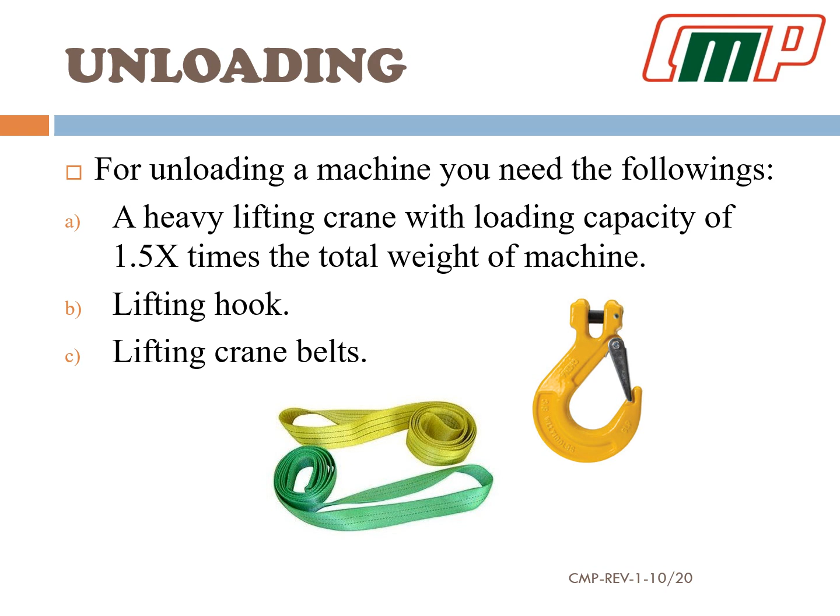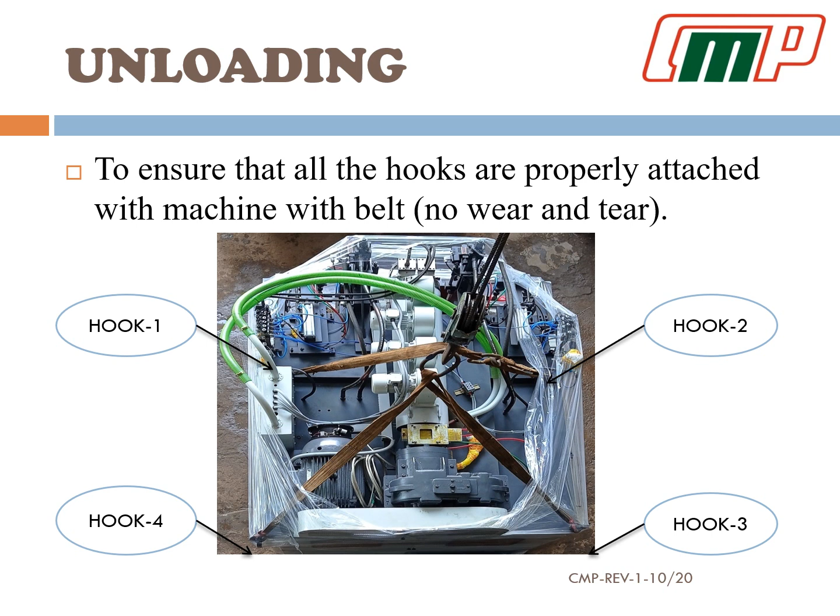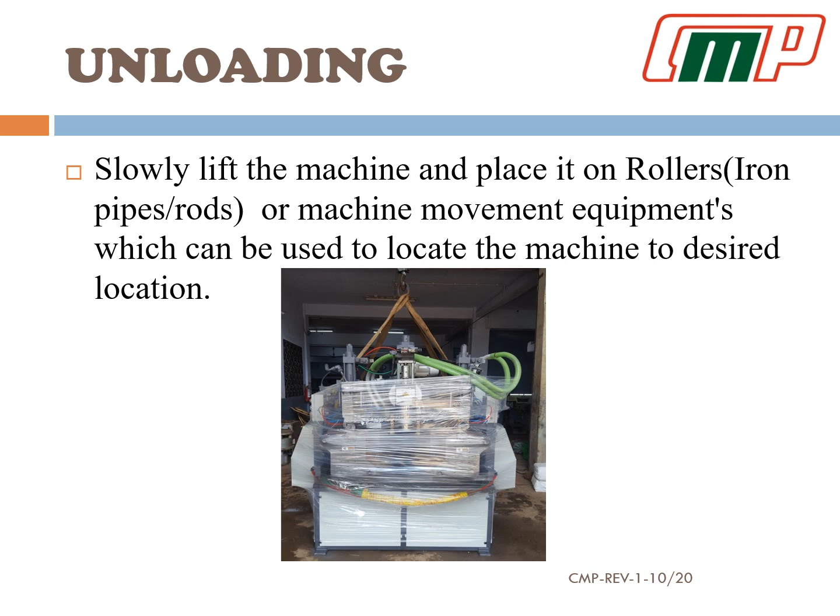Attach the hook, with belts, to the machine. Make sure that all 4 hooks are properly fitted and tightened to the machine, as well as the crane. Slowly lift the machine, and place it on rollers, iron pipes or rods, or machine movement equipment, which can be used to move the machine to the desired location.

Before mounting the machine, you need to note down the following. The foundation should be constructed of concrete. The structure of the foundation should be leveled and free of irregularities. Bolt the machine to the foundation with the help of foundation bolts. You can also use leveling pads or anti-vibration pads.

Make sure there is proper ventilation of the machine, minimum 1 meter, from the back as well as from both the sides. Adequate headroom must be provided for hopper filling. Ensure that the panel is placed to the right side of the machine, with a minimum distance of 1.5 to 2 meters from the machine.

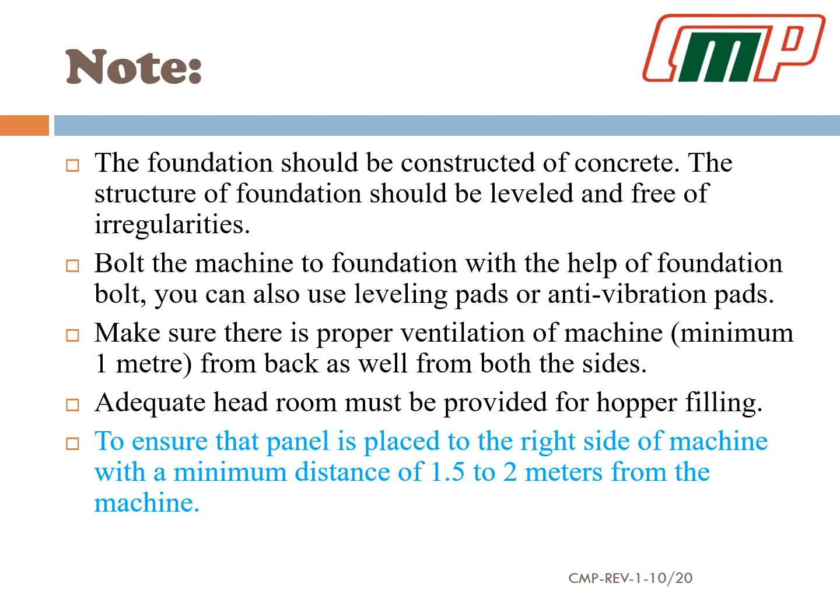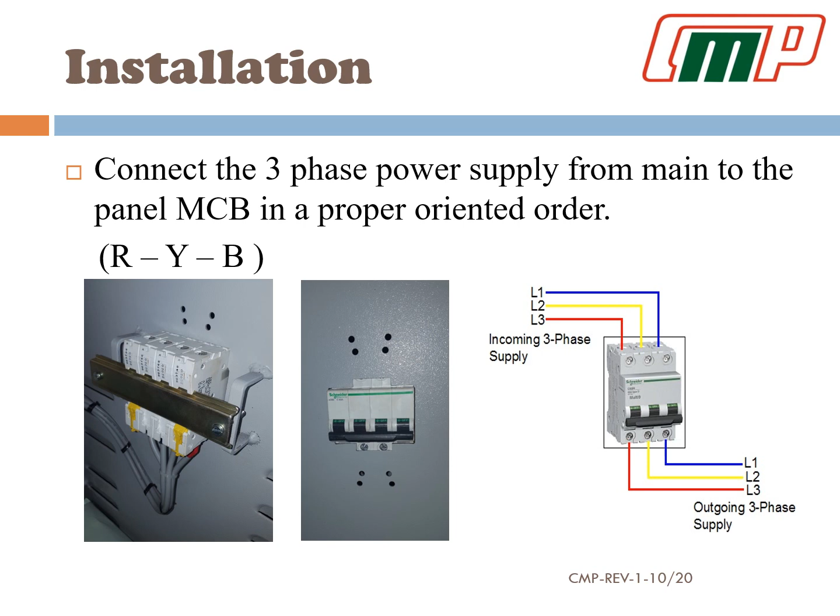After physically installing the machine, now it's time to connect the power supply. Make sure that the connection is done by a trained individual. Connect the 3-phase power supply from main to the panel MCB in a proper oriented way: red, yellow, blue. After connecting the 3-phase power supply to the MCB, connect the neutral to the panel, as labeled.

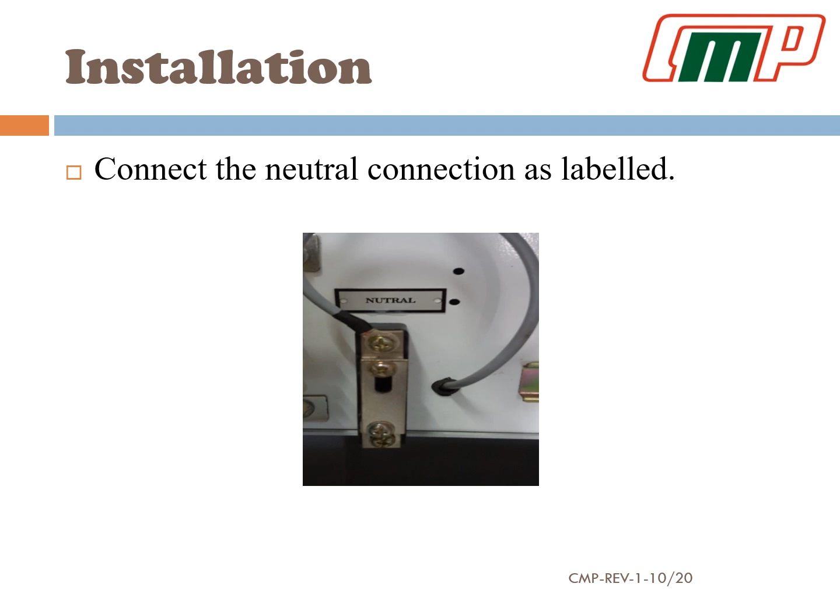Connect the allied connectors to the panel in a proper oriented way. Connect the male and female parts in a proper oriented way and tighten the bolts. Make sure that male and female parts are properly attached. Ground the panel as well as the machine. Connect an earthing wire to every single point in the panel, as well as in the machine, as labeled.

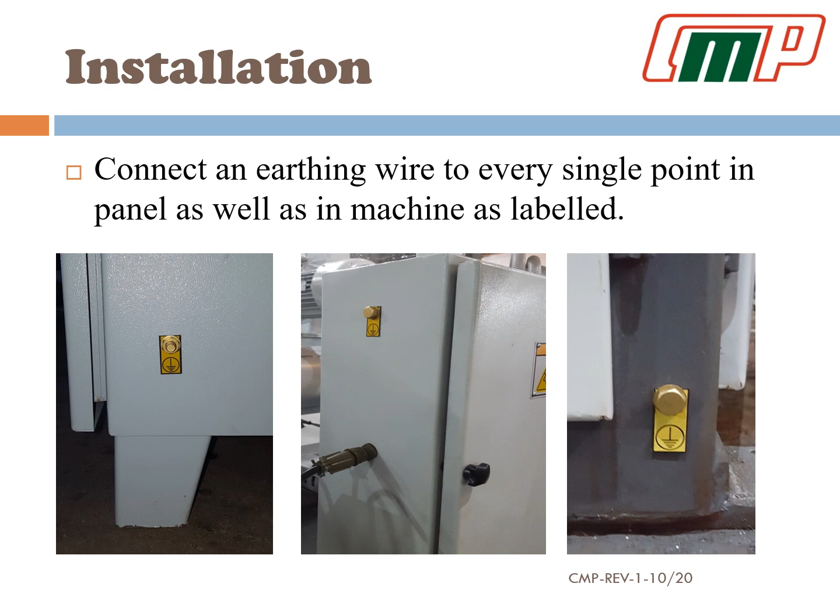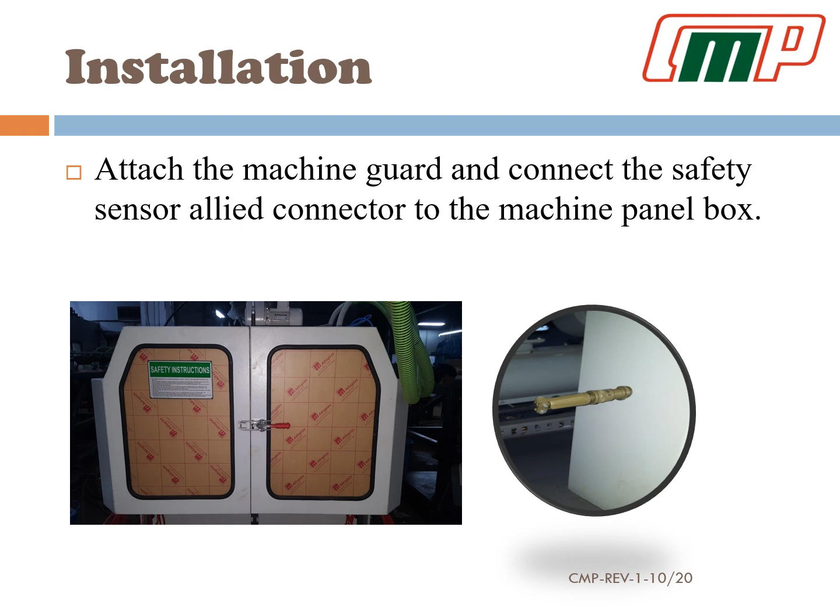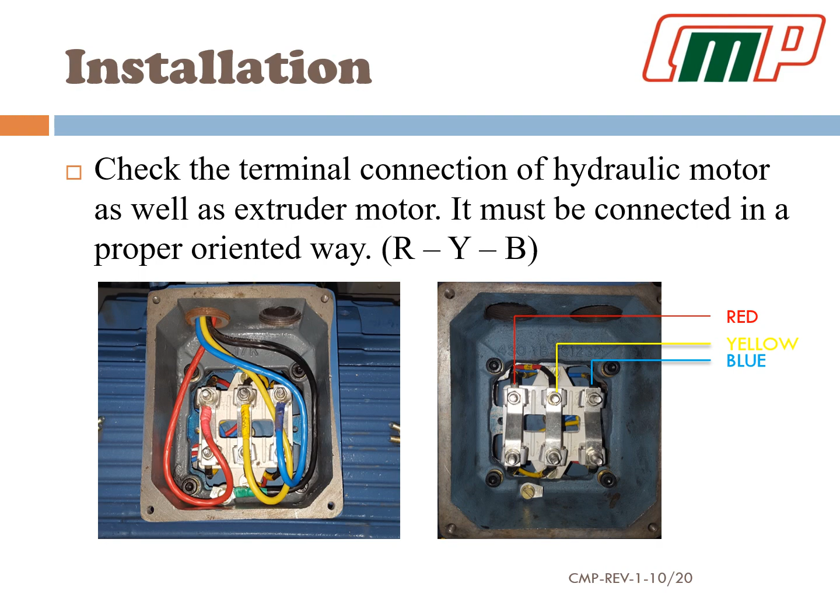Attach the machine guard, and connect the safety sensor allied connector to the machine panel box. Check the terminal connection of the hydraulic motor, as well as the extruder motor. It must be connected in a proper oriented way, as shown: red, yellow, blue.

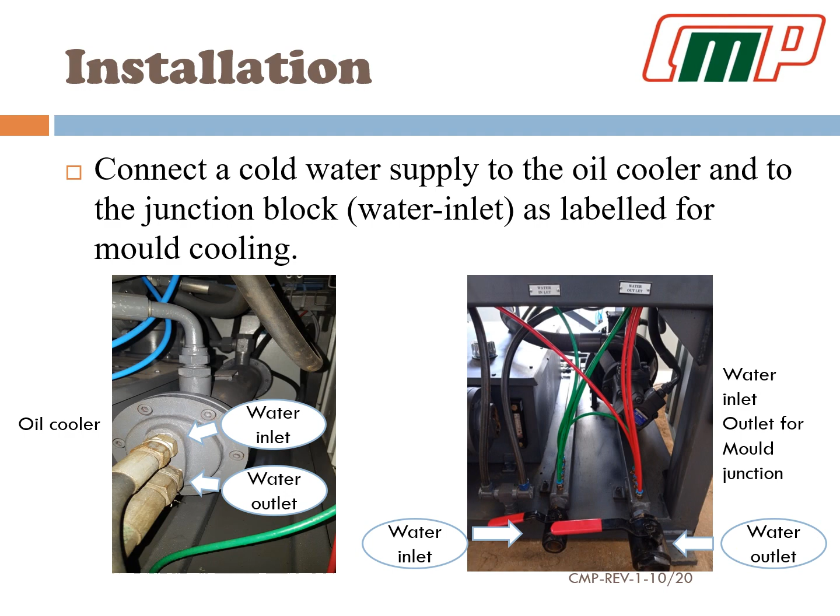Connect a cold water supply to the oil cooler, and to the junction block water inlet, as labeled, for mold cooling. Connect a suitable capacity of dry compressed air to the inlet section of the FRL unit, through the air inlet as labeled.

Attach the hopper with the hopper block, and tighten the bolts properly. Note: the hopper should be cleaned before mounting. Use a magnetic grill in the hopper to prevent damaging the screw and barrel from iron and metal particles mixed in the raw material.

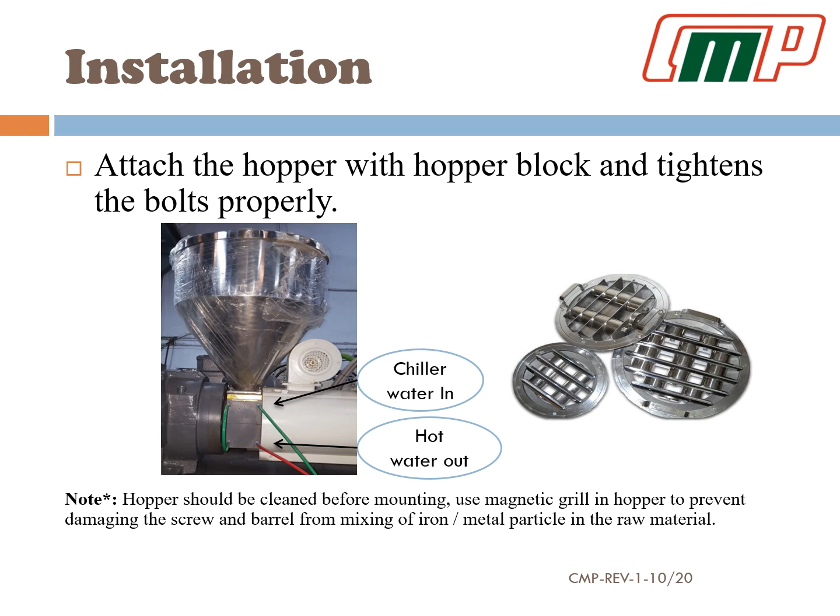Fill the oil tank with the recommended grade of hydraulic oil. Maintain the degree of contamination of the fluid. Use a 25 micrometer or finer inline filter. Note: make sure no unwanted dissolved material is added in the oil tank.

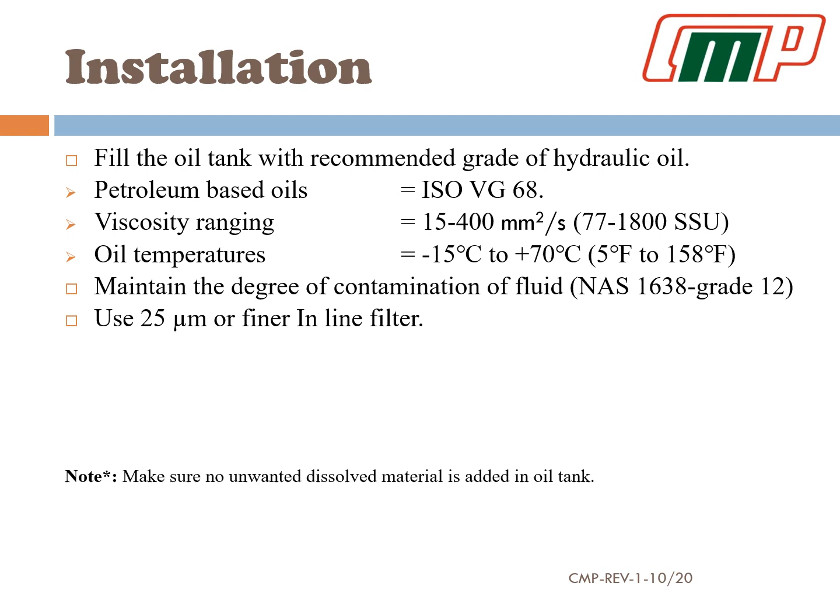Check the level in the main gearbox, and top up if necessary, with the recommended grade of oil. Pull the oil level indicator upwards to check the oil. Oil level should not be less than 1, as per the mark.